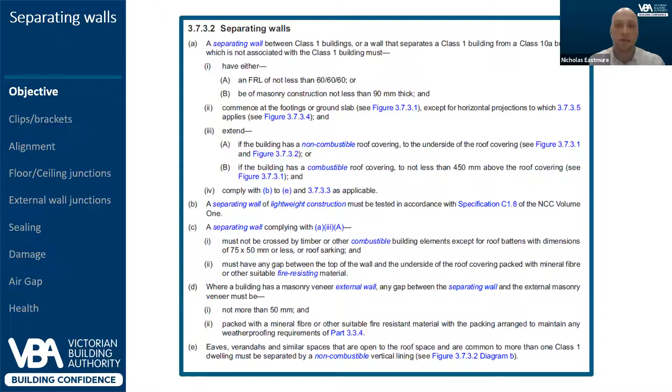This is where we turn to part 3.7.3.2 of the NCC for the requirements of separating walls. We know that most separating walls on site are lightweight construction, so let's remove the permit related items so we can keep this down to, again, its most basic principle for on-site construction. This is that our separating wall must obtain an FRL of not less than 60/60/60. I will make a big point here in that this test requires the wall to meet the required FRL on both sides of the wall. This is unlike a typical external wall of a single dwelling in that it would only require the FRL on one side, being the external face.

There are other elements within this clause that relate to a lightweight separating wall that we will touch on, but let's leave the requirements for the relevant building surveyor assessing the permit documentation. The FRL of a building element is broken down into 3 components and is always expressed in the same order: structural adequacy, integrity, and insulation. Now that we know what the NCC requires, let's start looking at some of the walls used to meet these requirements.

Regardless of the separating wall being installed, we must remember that it is a tested system. System is the one word that I'm trying to emphasize here by showing the different manufacturers' details when it comes to providing the required fire rating. If we can start to understand how these systems work overall, it will give us a better understanding of each component and its role within the system. Now, let's have a look and see what a separating wall does to achieve our requirement and prevent the spread of fire.

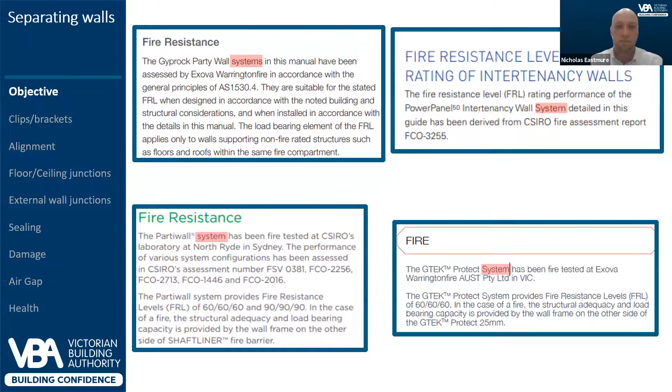How these systems work in the event of a fire is perfectly illustrated in the diagram located within the GTEK installation guide. As I previously mentioned, this system must obtain the required FRL on both sides, as we cannot assume where the fire will start. If a fire were to occur, then we need to make sure that the separating wall will remain functioning and not be compromised. If it was compromised, then we will no longer meet the performance requirement.

These systems are designed so that in the event of a fire, the connections between the wall and the frame melt. This detaches the separating wall from the frame exposed to fire so that if the structure collapses, the separating wall will remain in place to protect our remaining Class 1 from the spread of fire. Please note that it is for this reason the substitution away from the aluminium clips will compromise the entire system from the get-go. Now that we know how these separating walls work if a fire occurred, we can start to appreciate that the clips are a crucial aspect of the wall system. Let's look at what we observe on site.

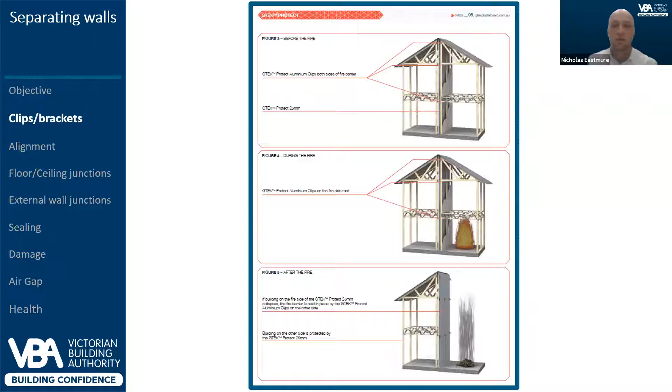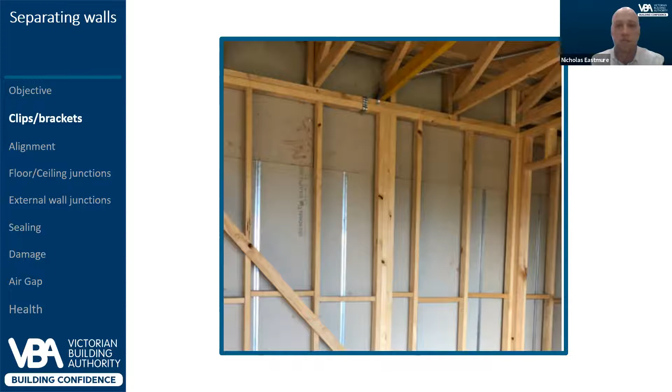You can see now where the clips are required to be installed on both sides of the wall. They were clearly missing from the photo, and it is a very common non-compliance that we come across. On this system, the clips need to be installed to the underside of the top plate and fixed into the metal H-stud of the shaft liner wall. The required spacing is at 600mm centers, and amazingly enough, these panels are 600mm wide. Therefore, every stud should have a clip, which shouldn't be too hard to remember when we go back out on site.

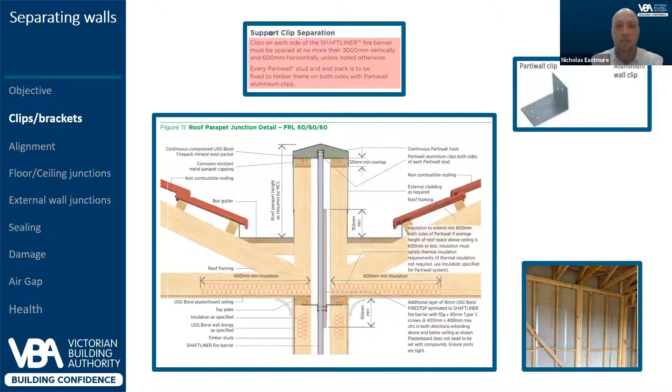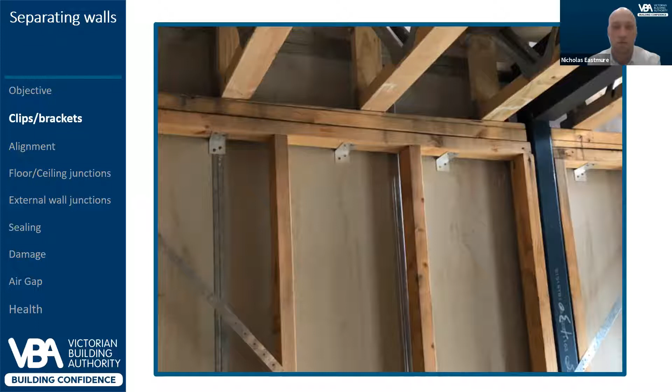Following on with our shaft liner system, this one is manufactured by Gyprock. We are looking at the junction between the ground and first floor areas of the adjacent Class 1s. You can see here that the additional layer of protection has not been installed, but let's keep our focus on the clips for the moment. You can see that they have been installed, however, they are penetrating the shaft liner rather than the party wall stud. This example clearly shows that even with inconsistent fixings, eventually we can get one right. Let's see what the system requires.

Here you can see that the Gyprock separating wall system not only requires the additional layer of fire stopping, but again reinforces that these clips must be installed into every H-stud on both sides of the wall. When we have penetrations into the shaft liner, we are compromising the fire rating of the system, and we can no longer assume we comply to prevent the spread of fire.

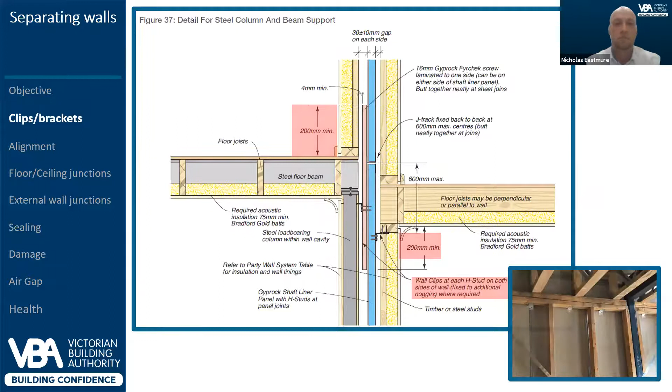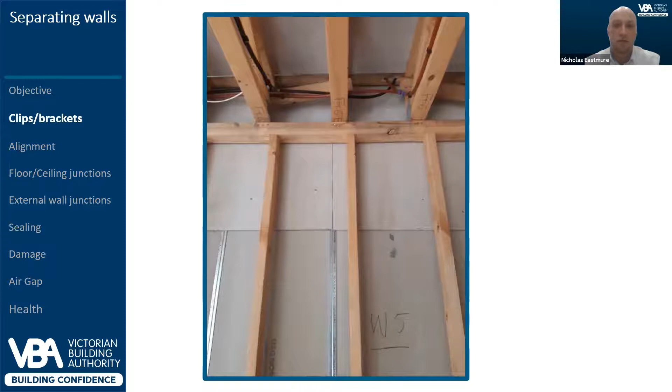Same thing as last slide, but a different site and back to the Boral system. This area is showing the floor junction between the ground and first floor of adjacent Class 1s. Unlike the previous slide, we can see here that the additional layer of fire stopping has been installed, but again, no clips have been provided to this side of the wall. Let's then compare back to the installation guide and see if this is as per our tested system. This detail is quite clear in what is to be constructed. The clips must be installed on both sides of the wall and fixed through the additional layer of fire stopping and into the H-stud.

It is important that we follow the installation procedure when installing these systems. The manufacturers have designed a product to facilitate a smooth construction process when on site. If we deviate from it, we create our own risks. Looking at the installation procedure in this case, the clips are to be installed progressively during construction and fixed into the party wall stud.

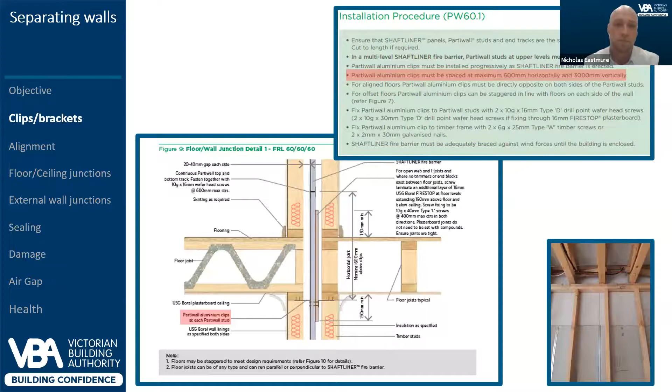Each manufacturer has their own installation details, but remember, to ensure we can prevent the spread of fire, we need to install the separating wall as per its test to confirm the FRL of 60-60-60.

If we have a look at this GTEK separating wall system, you can see that in the photo, the clips on this wall have been installed directly into the shaft liner and connect to the stud rather than the underside of the top plate. During this inspection, clips had been installed on both sides in a similar fashion. So is this what our system is meant to look like? Let's compare.

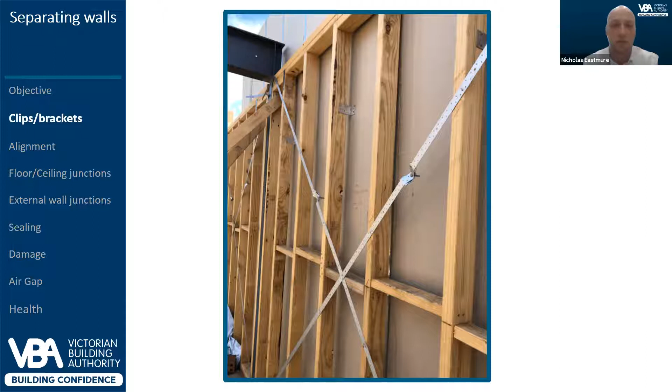We can see here that the manufacturer clearly states that there should be no penetrations into the GTEK Protect board. When we install clips like this, we are clearly compromising the fire rating and it should not be occurring. It will also raise other issues regarding the transmission of noise, but we will touch on that later.

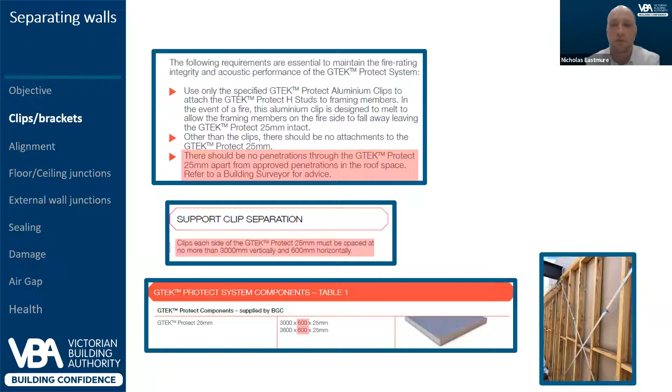Again, this product nominates that the clips are to be installed 600 mm horizontally, and yet again, our sheets are 600 mm wide. So again, on this system, every stud should have a clip appropriately installed. The clip installation is not just limited to the junctions of floors, but also applies to the fire separation within the roof area of the adjoining Class 1 dwellings.

Continuing with the GTEK system, but on a different site, we are now looking at a separating wall that is including a pitched roof. You can see here that the dividing wall has the additional layer of fire protection. It has the clips installed at the underside of the top plate and they're fixed into the separating wall studs. It's ticking all the right boxes so far.

However, there are no clips installed to the underside of the truss top chord. These are required to adequately support the wall and facilitate the required fire separation between the roof areas. So now let's have a look at how this system is required to be installed to ensure we can prevent the spread of fire.

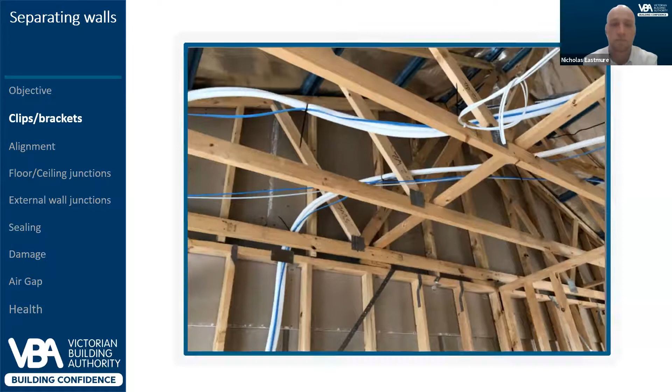We can see here that the manufacturer requires us to install clips on both sides of the wall. These are attached to the underside of the top chord and fixed directly into the H-stud of the separating wall. In this diagram, we again confirm that the clips to the underside of the top plate are correct, and at this site we had clips on both sides of the wall. So close, but yet so far from being installed correctly.

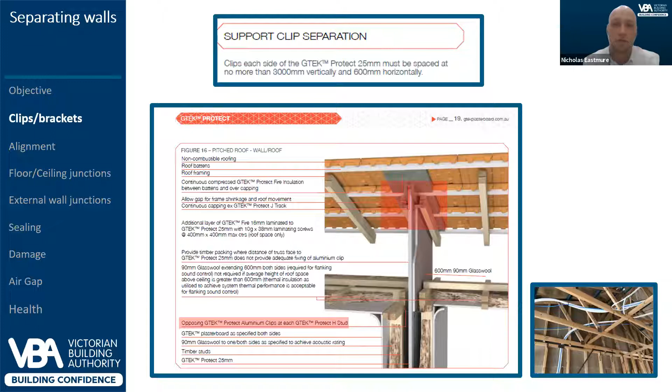This is not just limited to shaft liner systems either. Here we have a Hebel PowerPanel forming our separation wall. The area we are looking at is a junction between the ground and first floor areas of adjacent Class 1s. In this photo, again, we are not seeing the installation of brackets to this side of the wall. So let's again compare to see what we can see when compared to the manufacturer requirements.

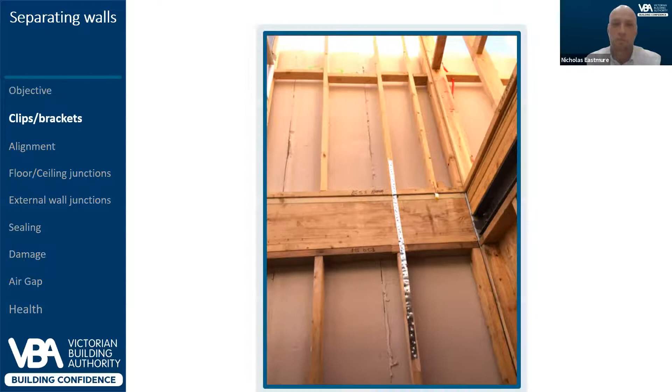We can see here that the system requires the panels to be fixed on both sides. The base panel is to be connected to the underside of the top plate, and the top panel is to be connected to the bottom plate of the upper story in this section. We must also ensure that these brackets are within 600 mm of the connection in the PowerPanel. Again, on this site, we observe the brackets were only installed to one side of the wall.

Given the importance of these clips to maintain a functioning wall in the event of a fire, we all need to make sure that we are attaching them correctly. The examples just provided would not be able to function and provide the required objective, which is to prevent the spread of fire. Now that we have a clearer understanding of the importance of clips, we can move on to the alignment of panels.

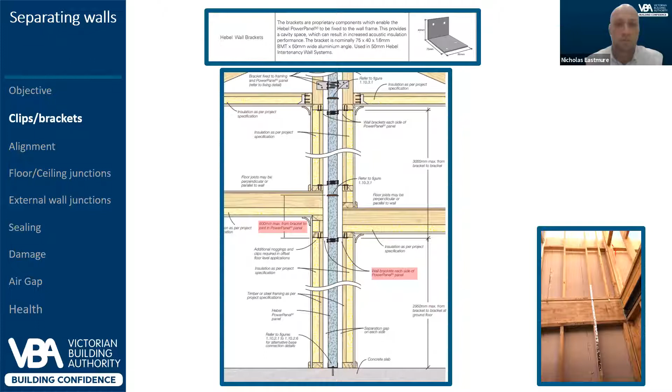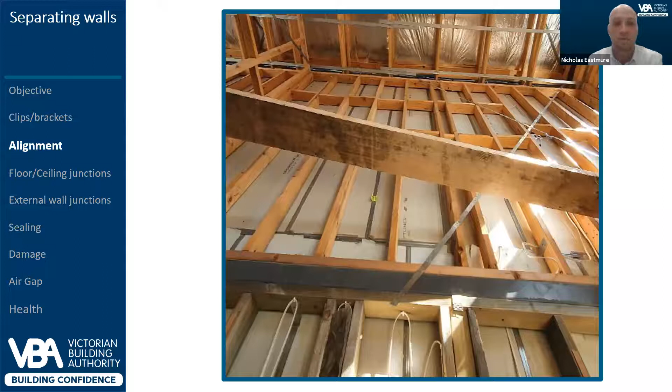Let's have a look. We can see here that the Boral shaft liner system requires the studs of the upper level to align with the studs below. These studs need to align vertically so they can transfer their own loads appropriately down into the footing. Where these panels are offset, we are deviating from the tested system and can no longer ensure that the required fire separation is being maintained. We must always seek advice from the manufacturer to confirm compliance when this kind of construction occurs. Let's have a look at other areas where this is seen, but on a Gyprock system.

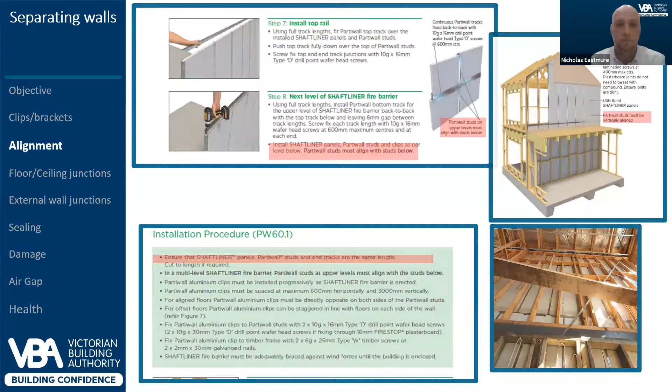Here we can see the installation of a Gyprock separating system, and it has the H-studs offset. We can see here a clip has been installed into the H-stud, but has not been secured to the underside of the top plate. It's not much use if there was a fire in the adjoining dwelling. There is no additional layer of fire stopping installed either, but this gives us another good look at the alignment of how these panels are connecting.

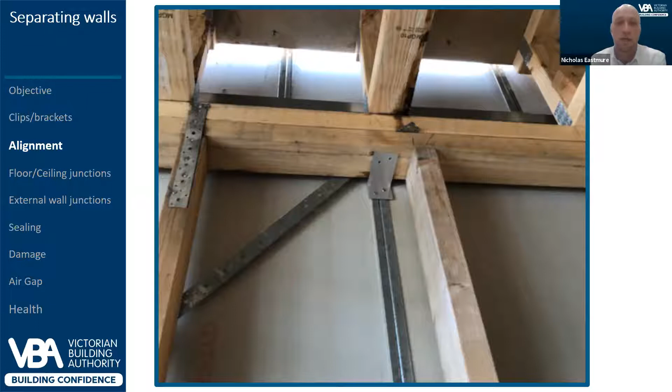We can see that this area is at the junction between the ground and first floor areas of adjacent class 1s. So let's compare this to what the manufacturer requires. We can see here that within the checklist provided by the manufacturer, the second item is to ensure the walls, all H-studs, align at each storey except in the roof space. The detail shown tells us that once we get to the roof space, we can have an offset of a maximum 300 mm in the stud alignment. This cannot be allowed anywhere else in the wall, and this will not comply with the tested system.

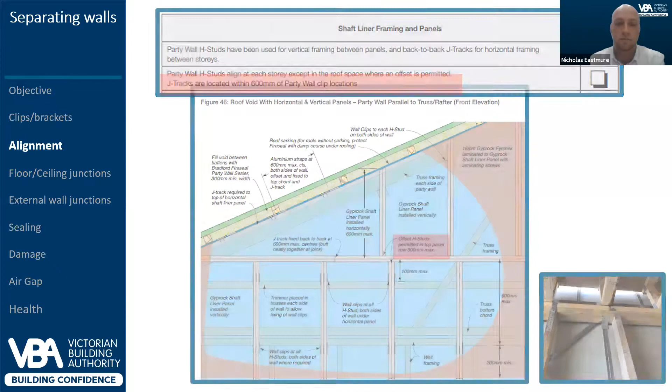Whilst we are on the alignment of panels, it is important that we then look to ensure the correct H-studs and tracks are installed. You can see in this photo that a Boral shaft liner system has been installed. Let's highlight quickly that the additional layer of fire stopping does not extend the full length, but we will also cover that later on. If we focus on the junction where the 4 panels are meeting, we can see that there is a clear gap in the connection due to the track being substituted by a H-stud. Let's see what the manufacturer requires us to install on site and see if we can be sure that this will provide our required fire rating.

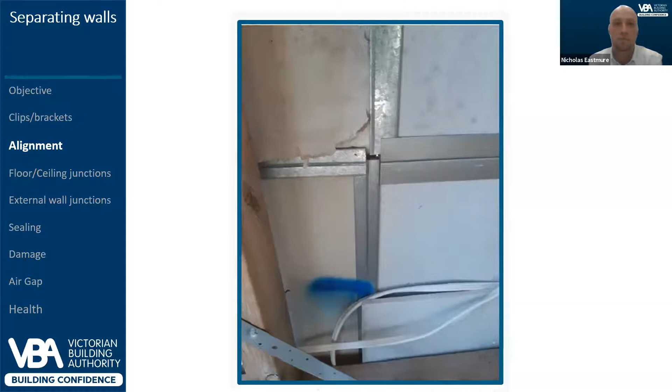Now we can see what the cross section should look like. It is clear that on this site, we have substituted the H-stud for the Partiwall track. We have not provided a continuous steel track running the length of the wall, and the studs are not terminating correctly. If this had remained as is, in the event of a fire, this would have failed due to this area. Alignment of panels is very obvious when you're on site. Please do not overlook this area. So now we can move on to the floor junctions, which we have touched on a few times now.

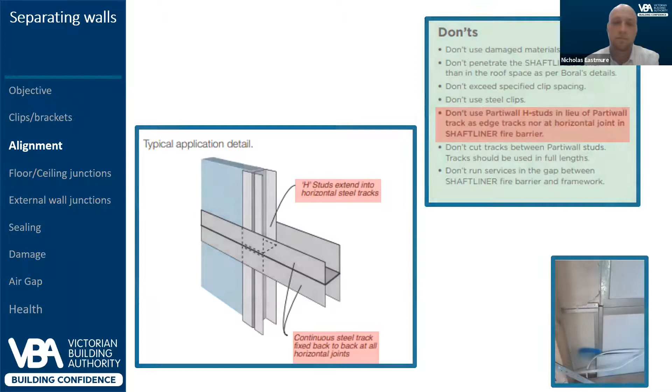You will notice that most shaft liner systems will require an additional layer of fire stopping when it comes to not only floor, but ceiling junctions. This is due to the increased fuel load seen in these areas caused by the intersecting timber members. Again, this wall must maintain its FRL for 60 minutes, and this is where a lot of the hard work will occur. It is critical that we get this additional layer installed correctly, and it is again another common item we observe as non-compliant. In this photo, we can see that a Gyprock system is being installed. We are looking at the first floor junction of adjacent class 1s and can see that the additional layer is only extending below the junction and has a lot of fixings along the base. So let's have a look and see how this compares against what needs to be installed.

We can see here what the Gyprock system requires from us. The additional fire stopping must extend a minimum of 200 mm past the floor and ceiling junction and be fixed to the shaft liner with laminating screws at 400 by 400 spacings. On this site, we were not getting the required coverage above the floor joists, and our very enthusiastic person laminating the additional fire stop has decided to increase the fixings due to not being able to install the additional rows of screws. This compromises the system. It's good to see the panels are aligning though, and the clips have been installed. Let's have a look at the same thing, but on a GTEK system.

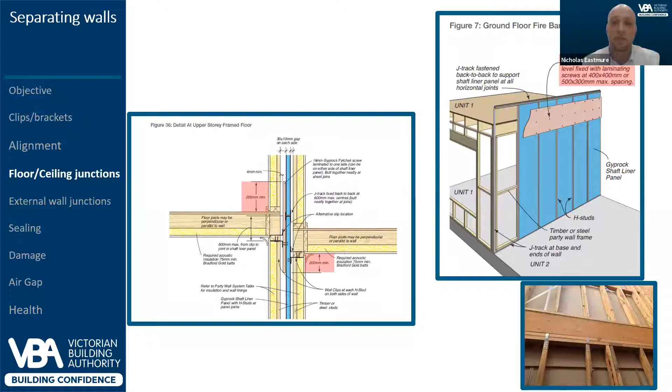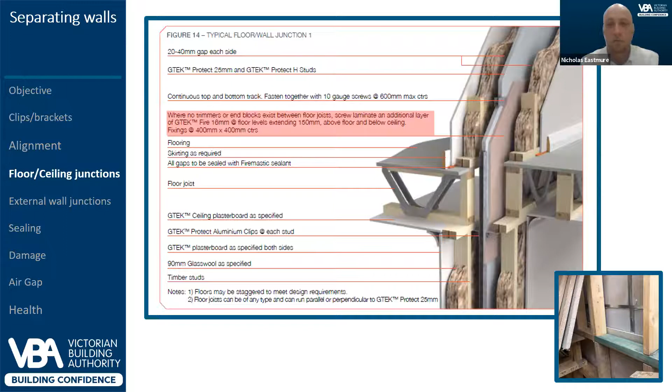Again, we are looking at the junction of floor joists to the separating wall between adjacent class 1s. You can see in this photo that we have the additional layer installed and our panels are aligning, which is a good start. But again, we bring it back to the tested system and the required installation guide. So let's compare. We can see here that our additional layer of GTEK Fire is required to extend a minimum 150 mm above and below the floor or ceiling. We were not achieving this on site. And again, thinking about the additional fuel load sitting in this area, we can no longer be assured that we will maintain the FRL of 60/60/60. So let's now look at a Boral system for the same thing, and I'm sure you are getting used to the idea of what is required.

So again, we have our Boral shaft liner at the junction of the floor joists. These panels are not aligning and our coverage for the additional layer is minimal. Let's look at what we need to install to again ensure we prevent the spread of fire.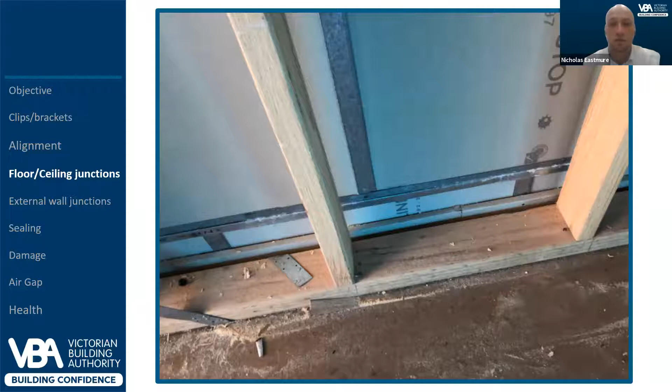The additional layer for the Boral wall is also required to extend a minimum 150 mil past the floor joist as shown within the detail. This is clearly not being achieved on this site and will only limit the separating wall's ability to prevent the spread of fire.

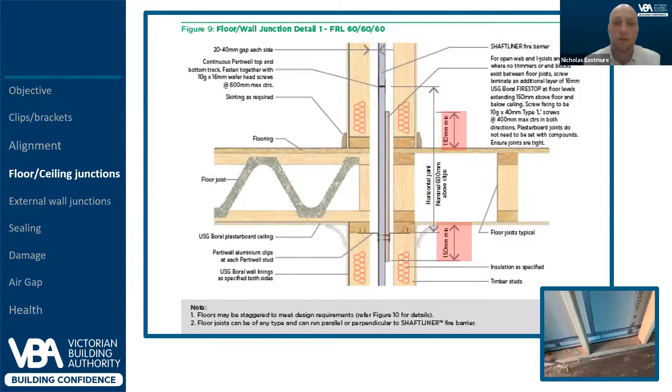We have to make sure that these additional layers run the full length of the wall. As you can see here, and as touched on previously, the additional layer of fire stopping terminates well short and leaves the remainder of the dwelling exposed at this junction. This is not in accordance with the tested system and leaves the occupants at risk in the event of a fire.

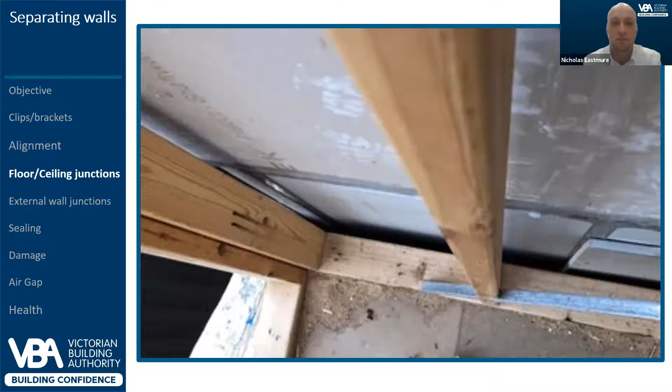So let's move on to the ceiling junctions. It is the same setup in that there is an increased fuel load in this area and requires particular attention. Here we can see a Boral system being installed. We are looking at the parapet junction between adjacent Class 1 dwellings. We can see that no additional layer of fire stopping has been installed and neither of the clips.

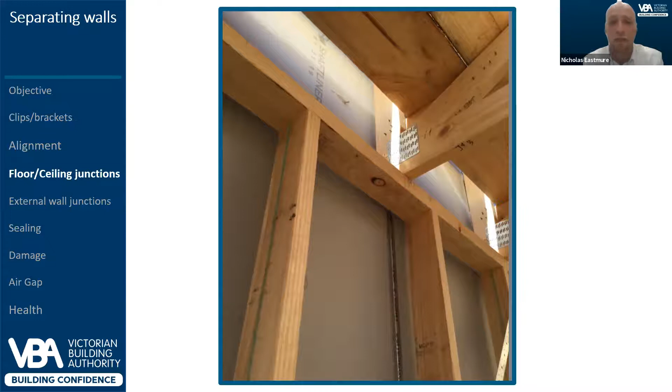Not installing the clips works out well in this scenario, given they need to go through the additional layer of fire stopping and into the H-stud. So let's look and compare this to what our manufacturer installation requirements are.

We can see here again that the additional fire stopping is required. It is required to extend 150 mil past both sides of the gutter and ceiling and clip to the frame appropriately. If left like this and a fire occurred in the adjacent unit, the roof area will be left unprotected and fire will be able to spread.

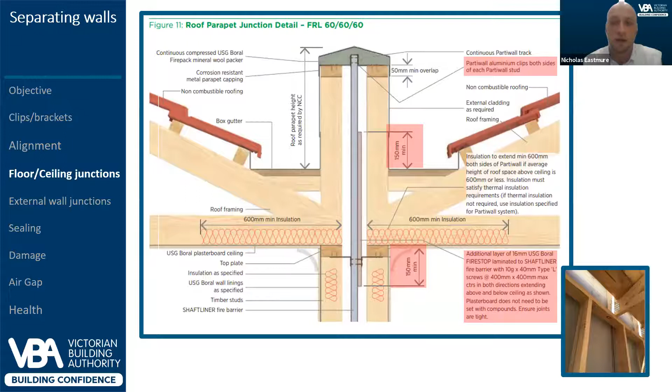Let's now have a look at the requirements for a Gyprock separating wall. As you can see from this photo, we already have some concerns with the clip installation as they are not installed into the H-stud. And we also do not have any additional layer of fire stopping. This is where it is imperative that we always refer back to the manufacturer's guidelines to ensure we are installing it correctly. So let's look at what is required.

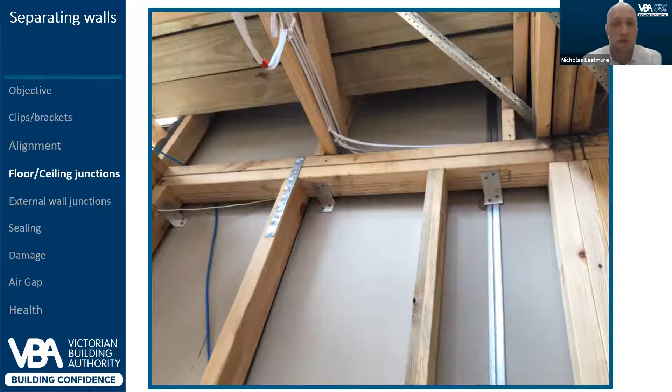In a Gyprock system, the additional layer of fire stopping is to be installed to the top of the shaft liner and must extend a minimum 200 mil below the ceiling. As you can see here and hopefully start to appreciate, there are different spans required for different systems. Do not fall into the habit of assuming all systems are the same.

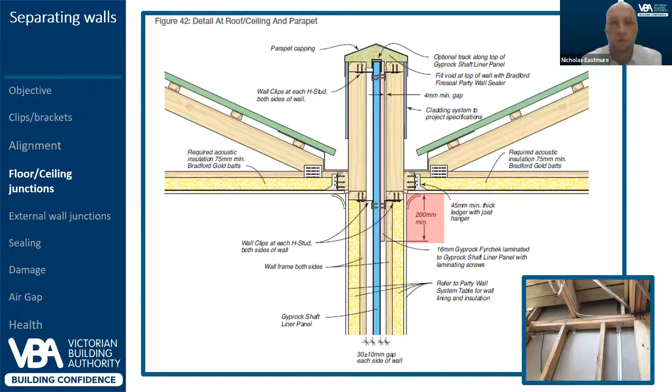When it comes to laminating the additional layer to the shaft liner, we need to again make sure we are doing it correctly. As you can see in the photo here, the laminating method chosen for the Boral shaft liner was to use nails with a very inconsistent spacing. As always, let's turn back to the required installation.

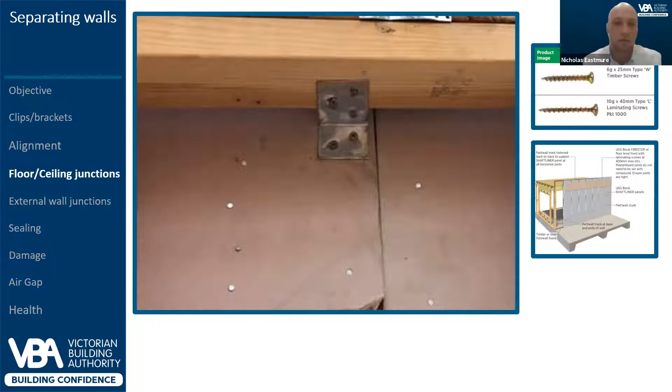We can see here that the tested system requires us to utilize laminating screws at 400 mil max centers. This is a substantial deviation from the tested system. With incorrect fixings and spacings, we are no longer ensuring that we can prevent the spread of fire.

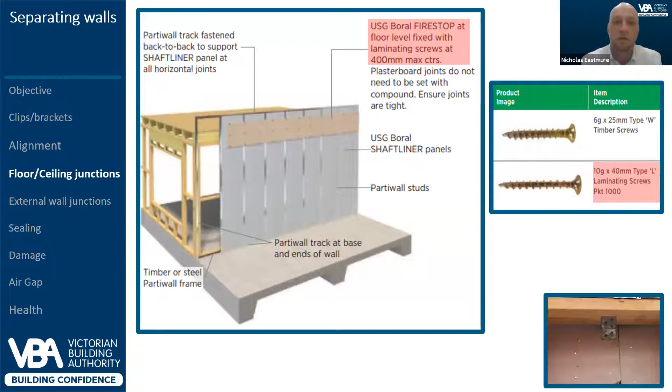You can see here we are looking at the top of the separating wall, which again is a Boral shaft liner. The very obvious concern we can see is that the separating wall does not go to the full height of the dwellings and will only facilitate the spread of fire. We can see the additional layer has been provided, which is a great start, but again, nowhere near its required location.

Despite me saying not to make assumptions, it is safe to say that regardless of the system, we must make sure that it extends the full height of the Class 1 dwellings. So again, let's revert back to what the manufacturer requires when terminating at a parapet.

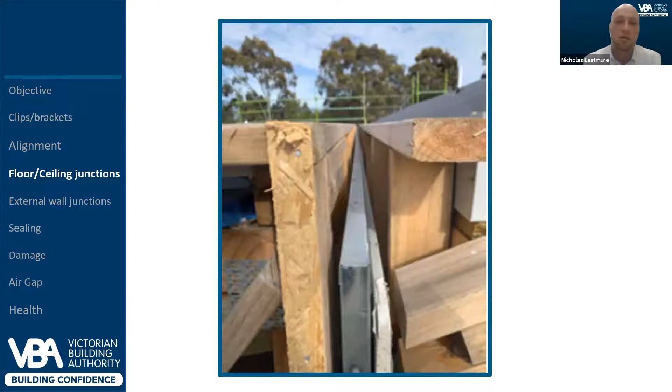We can see clearly that the shaft liner is to extend beyond the timber frame and then be packed with a suitable mineral wool packer to then seal the top gap. The additional layer is also again required to extend 150 mil past the gutter and ceiling. This has not been installed correctly, and we cannot demonstrate that this construction will prevent the spread of fire.

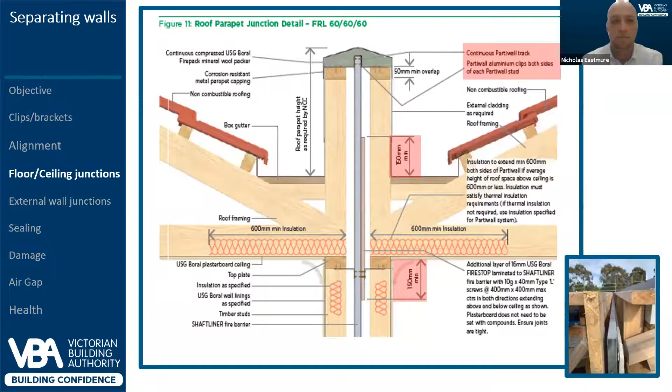So let's again look at the roof junction. On this site, we have a Hebel wall that was utilized. It is important to also keep in mind that these systems will throw back to the NCC for the allowance of members to cross a separating wall.

Similar to the shaft liner systems, we have to ensure that all gaps are appropriately sealed. As you can see in this photo, the combustible roof battens are crossing the separating wall, and there are gaps between the Hebel and the roof lining. So let's have a look at what is required by both the manufacturer and the NCC.

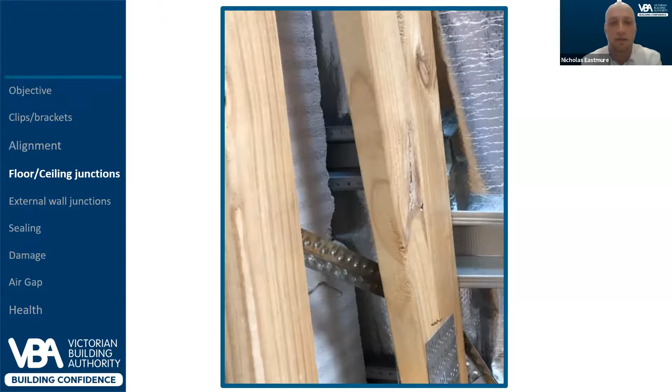As we can see here, the Hebel installation guide requires us to fully seal the gaps with the required Bradford Fireseal party wall sealer with 10% compression. This is not the case for what we saw on site, and left open, the wall will not prevent the spread of fire.

You will notice that the detail also nominates the NCC clause 3.7.1.8 subclause D. This clause is referencing the 2016 version of the NCC, but the relevant provision for the NCC 2019 is 3.7.3.2 with subclause C, which has been shown.

This clause is important as it details the only members that are to cross a separating wall. In this instance, we have combustible roof battens, which is allowed providing we terminate the wall appropriately. The infilling of these gaps is shown within II of this clause. But again, the wall system is tested to ensure this aspect of the NCC is covered, and the note is closing the loop between these two documents.

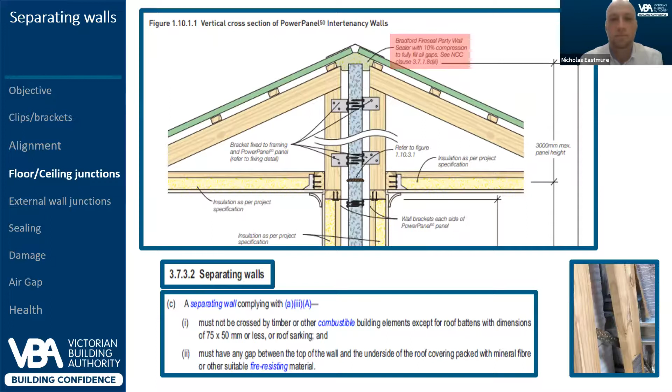So now we can look at how we are terminating the separating wall at an external wall. In this instance, we have a Boral shaft liner system being installed and is viewed from above. We will touch on the external track required at the end of the panel shortly. However, let's get into the hot topic right now, which is when we utilize EPS as an external wall. This is a big concern when the EPS forms a continuous horizontal link across the shaft liner system, which is being shown here. Let's look closer at the external wall junction and what is required.

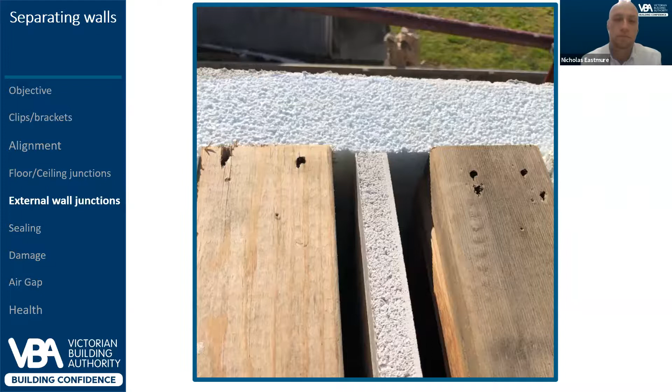So as you can see here, the Boral shaft liner system has a detail on how to terminate appropriately with a lightweight external cladding. This detail is important to understand. It allows us to terminate at the external cladding, but as we are all well aware, EPS is combustible. In the current example, our shaft liner has an FRL proven on both sides and takes into account how it interacts with the external wall.

Where we have EPS as our external wall, once it is exposed to fire, it will not be able to maintain the FRL required of 60/60/60, and it will spread to the adjacent dwelling. We then no longer comply with the performance requirement, which was to protect the Class 1s from the spread of fire. In this situation, the EPS was later replaced with Hebel to achieve compliance with both the manufacturer's installation guide and the NCC. Please keep an eye out for this occurring and speak to your relevant building surveyor for further advice.

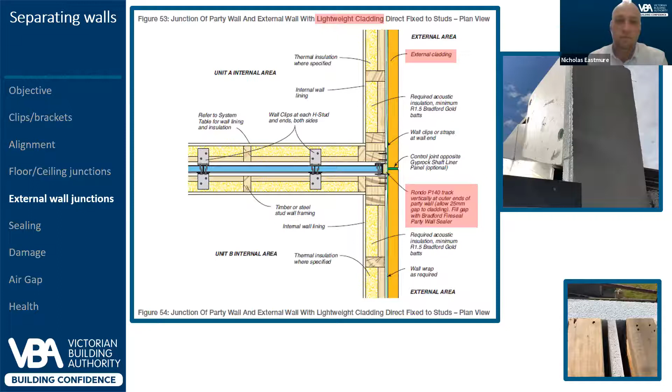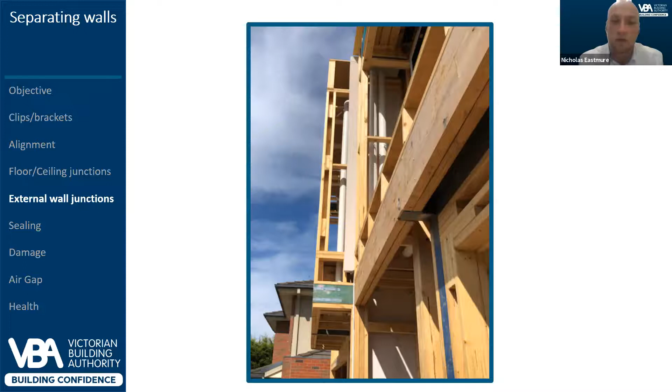Continuing with the termination at external walls, let's have a look at this Hebel installation. As you can see in the photo, the separating wall stops well short of our external wall. If you can put your arm from one Class 1 to the other, then we will not comply. So let's have a look at what this should look like on site. As we can see here, the Hebel product allows for overhanging walls. It is important that the PowerPanel is installed so that it can terminate appropriately with its external wall. If this cannot be achieved, then once again, we won't prevent the spread of fire.

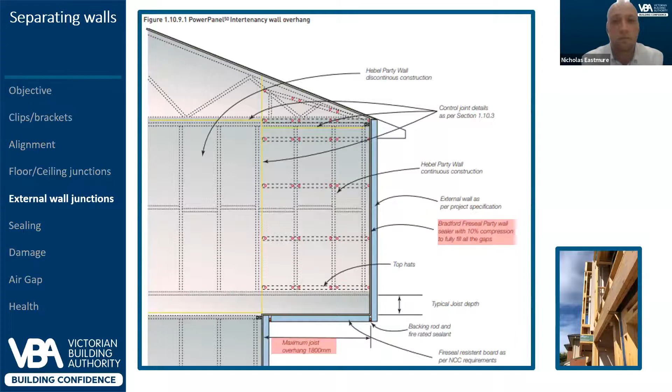This is not limited to one system either. We can see here that our Boral shaft liner is not extending the full length of the dwelling, and the base track was terminating in line with the end of this panel. These areas cannot be overlooked, and the entire length of the Class 1 must be protected. Within this detail, you can see that a continuous party wall track is required to be installed to the end of the wall panels. Within the installation guide, the system allows us to cut the last panel to size. We should not leave areas like this open to facilitate the spread of fire.

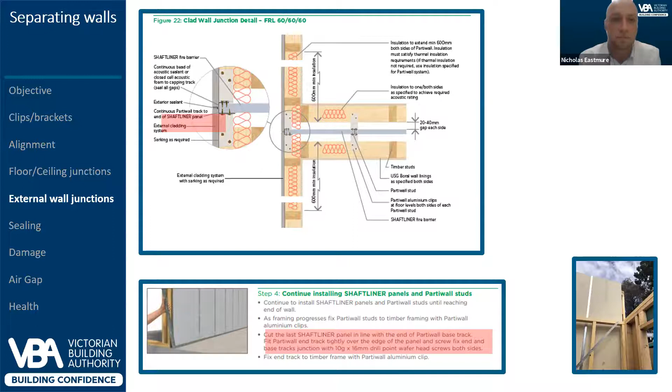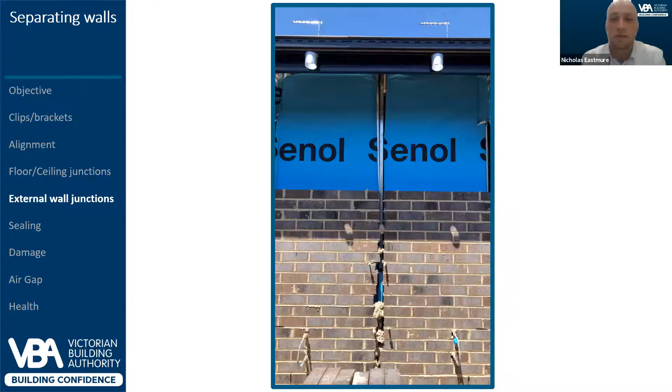In this situation, we were looking at a Boral shaft liner where it is intersecting an external masonry wall. We can see that the separating wall is spanning the whole length and the additional layer of fire protection installed at the roof area. It is important to get these areas correct, as any gap, which includes the rebate, will not prevent the spread of fire. So let's look at what is required on this system, as this is another very common non-compliance that we observe.

You can see here that for the shaft liner, the shaft liner is to be covered by a continuous compressed mineral wool packer, and the insulation is to extend over this to ensure it is not exposed to weather. This detail also shows that a control joint is required opposite the shaft liner. This is handy when it comes to doing inspections.

If you are doing a final and the control joints have not yet been weather sealed, have a look through and see what is visible. If you can see a shaft liner track, well then you know there is nothing infilling the rebate. So hopefully now we have a better understanding of external wall junctions. We'll now jump into the sealing of separating walls.

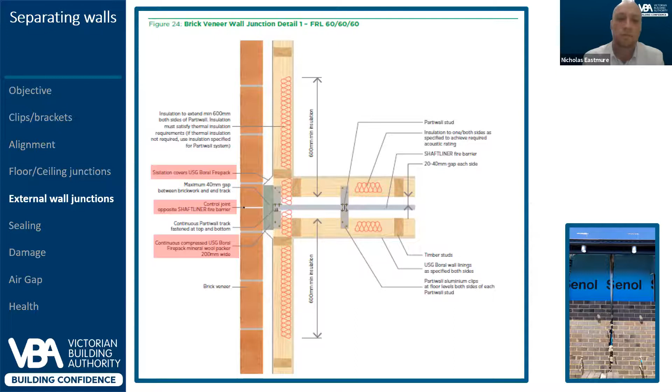This item is very commonly overlooked, as most of our attention turns to looking at everything above the base of the wall, but it is critical that we seal the base. This photo is showing a Boral shaft liner system from above. Its base track has been secured to the slab, but there is no evidence that it is being sealed on either side of the wall. So again, let's have a look at what the manufacturer requires.

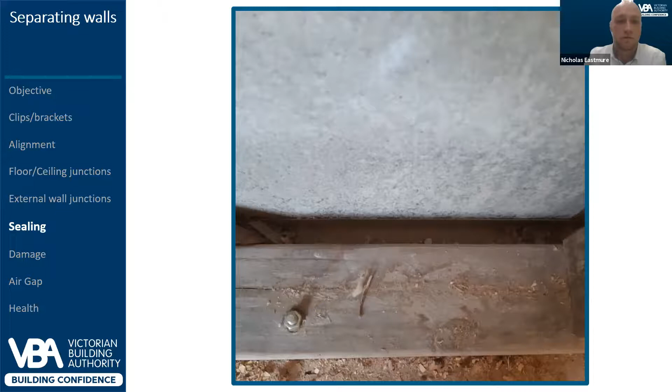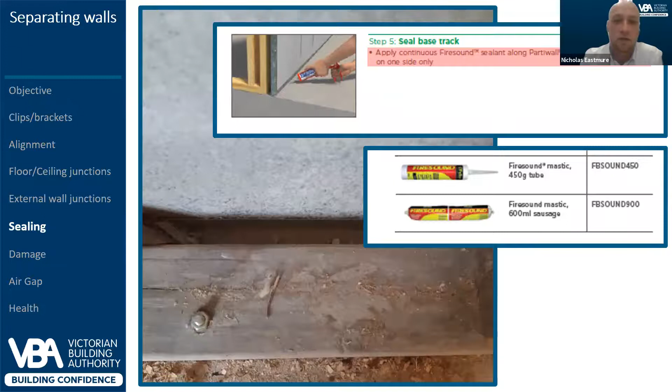As you can see within the manufacturer's installation guide, step 5 requires us to apply a continuous seal along the base track on one side. They have also nominated suitable products to be utilized as part of this system. If we do not seal the base track, we cannot be certain that we are preventing the spread of fire.

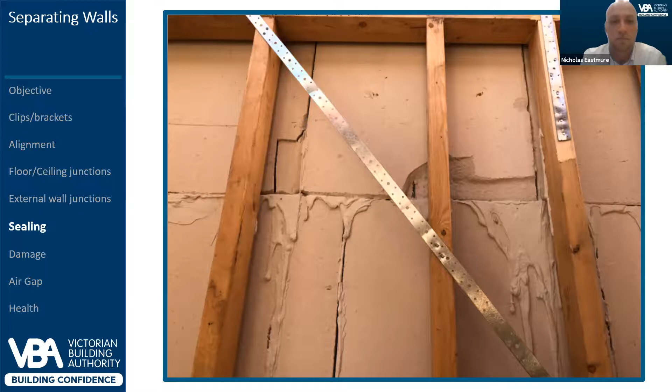So now we can see the before and after image of the same wall. Bringing this back to its installation requirements, we first need to make sure that we are installing these panels correctly. To do this, we must follow the adhesive requirements. It asks that we must have a joint that is at least 2 to 3 mil thick after suitable pressure has been applied to the panels to ensure an appropriate attachment.

The force applied should make the excess adhesive protrude, which then gets scraped off, ensuring a tight seal across the panel. To then seal the wall, any other remaining gaps or movement joints must then be sealed so that both the fire and sound ratings can be achieved. So now let's move on to damaged panels within our separating wall.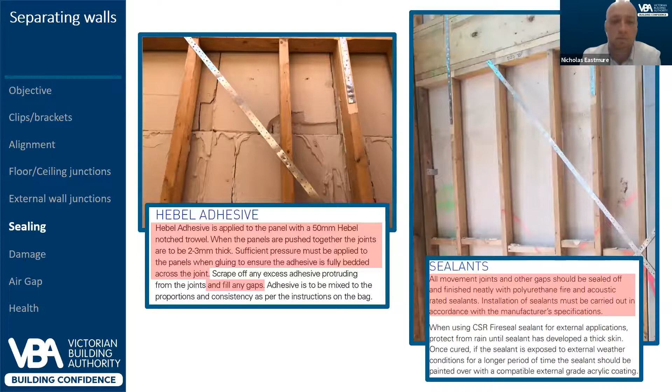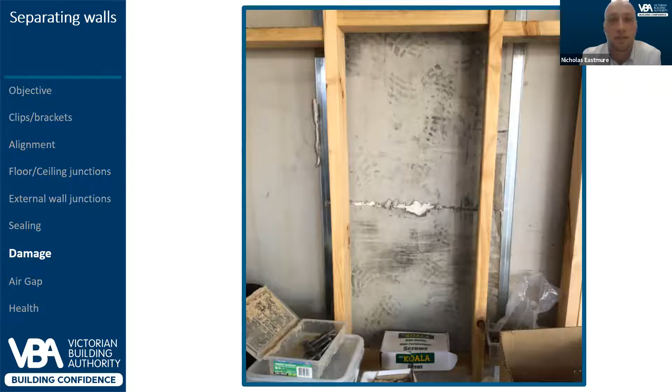Here we can see that on-site storage plays a big part in keeping these materials fit for purpose. If they are laid around in high traffic areas, trades will walk on them. So again, let's go back to the manufacturer's installation guide, which in this instance is Boral. Here we can see that the first item under the don't section is not to use damaged materials. In this instance, the rectification works were sought from the manufacturer and subsequently installed.

You can see that the repair work extends well beyond the area of the damage. This is not only due to the reduced effectiveness in the case of a fire, but also because the wall systems have other tests required to confirm things such as its resistance to damage, deflection, and surface indentation. For those interested, these tests are outlined within the NCC 2019 Volume 1 Specification C1.8.

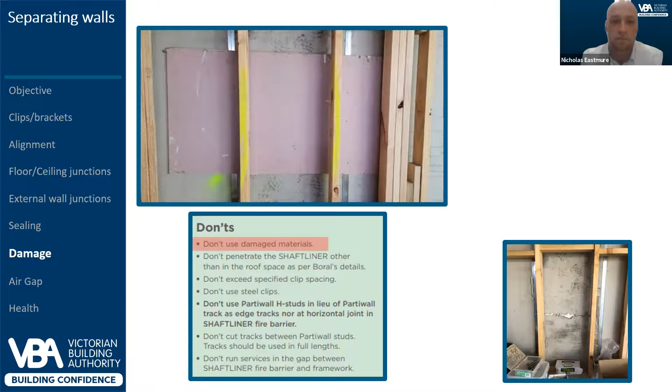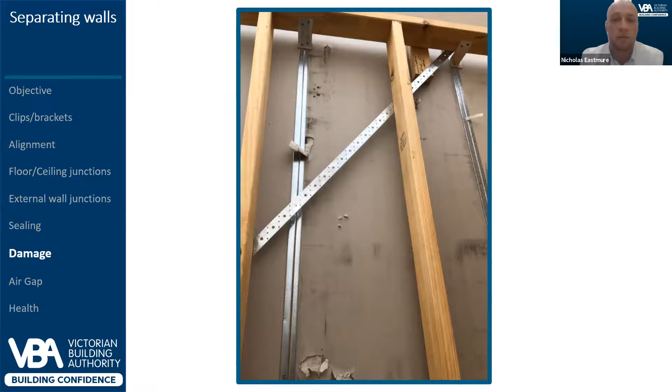Again, illustrating the point for the damage. In this photo, we can see that the Gyprock panel has been damaged and has seen better days. Different manufacturer, so again, let's have a look and see what they say in regards to damage. We can see here that when it comes to the Gyprock system, any physical damage to either the core or paper face must be replaced. And on this site, that is exactly what they did.

Not all systems have the associated testing to confirm the repair works can maintain the wall system. It is for that reason we always go back to the manufacturer to determine the appropriate remedy. We have just covered a lot of the concerns that proactive inspections have found for aspects relating to the fire separation. But as we now hopefully understand, this is a system that we are installing.

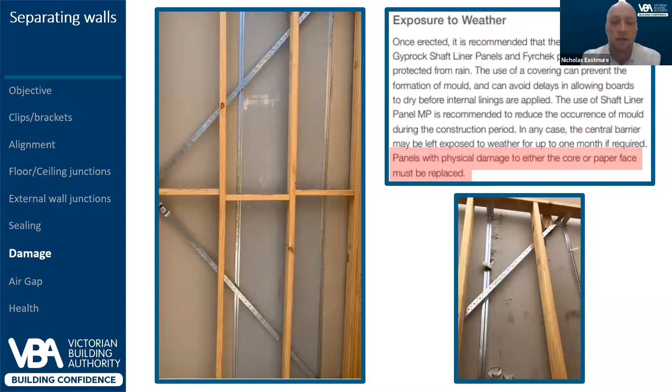The wall itself has to do a lot more than just provide fire separation. It must also provide the required insulation against sound transmission. It is important to understand the dual purpose of these walls when it comes to the details within the installation guide. So we will now look at the air gap.

As you can see here, we have a Gyprock fire separating wall system. It is not providing the required gap between the shaft liner and the timber frame, and on some sites we see the shaft liner in direct contact for the full length. So let's have a look back at the required installation detail.

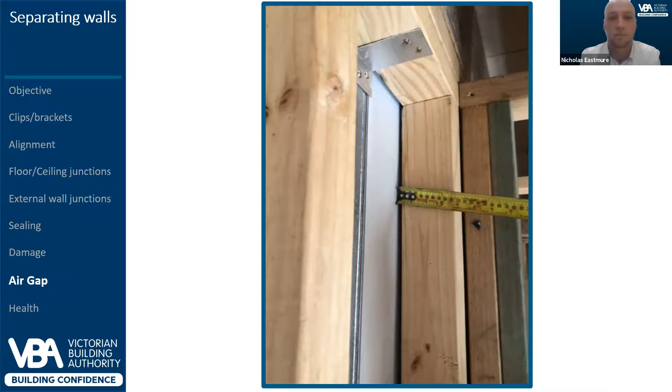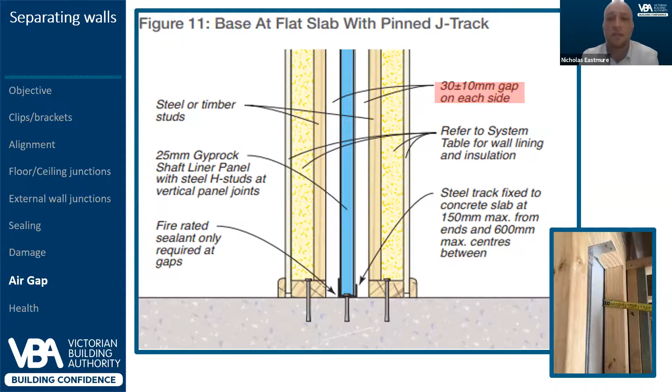As you can see here, and like shown on previous slides, we have to provide a 30 mm gap to each side with an allowed 10 mm variance. Again, this is to ensure our class 1s are insulated against the transmission of airborne and impact generated sounds. When we get this gap down to near 0 mm, it is going to significantly impact the ability for the wall to comply with the sound transmission requirements. These requirements around sound insulation are also not just limited to the air gap. So let's have a look at our next slide.

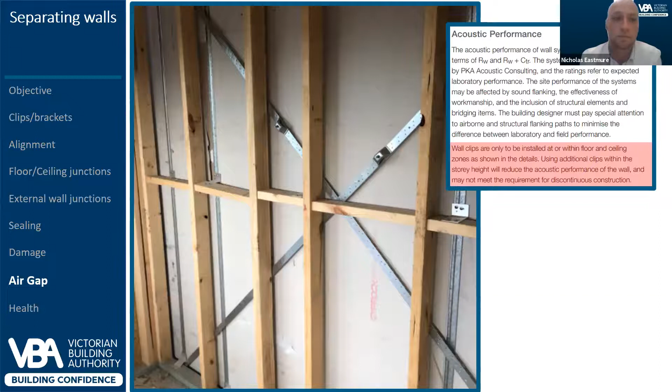Continuing on with our air gap, we commonly see this space filled with services. As you can see in the photo here, we have services directly fixed to the GTEC separating wall system and running within the air gap. Based on the requirements of this wall, the manufacturer states that all services should be run through the framing and that to maintain acoustic performance, the service pipes must not be in contact with the GTEC system, which has not been achieved in this scenario.

This is not limited to just the GTEC system either. You can see here we have our Boral shaft liner providing our separating wall. And again, we can see our services directly fixed to the wall, which will make us again have to consider the transmission of noise. It's pretty clear that the manufacturer states to maintain acoustic performance, service pipes must not be in contact with the shaft liner, and that all services should run through the timber frame. This is again evidently not what we are seeing at this site. So again, let's have a look at a Gyprock system with the same issue.

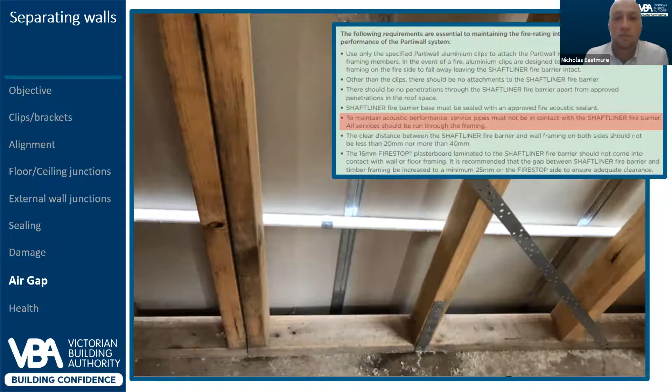Here we can see our Gyprock separating wall. You can see that the electrician has enjoyed his day running the cables within the air gap in lieu of through the timber frame. We can see here that the required installation for services is ideally through the timber frame, or if provided in the gap, we must maintain a minimum of 10 mm clearance to the shaft liner. In this instance, we would need to see that all cables were fixed back to the stud to ensure this could be achieved. Maybe not the most time-effective strategy overall.

As you can see in this photo, we have a Gyprock wall system that has been exposed to weather for too long and is now experiencing a large amount of mold growth. If this is covered, it will only spread and then pose a serious threat to the health and amenity of the occupants. It is recommended that the shaft liner system should be protected from rain and not left exposed for any longer than 1 month, which obviously was not the case here. So let's see this in another system.

Here we can see our Boral separating wall is experiencing a large amount of mold also. When it comes to the Boral shaft liner system, exposure of components to the weather elements should be avoided. And if it's going to be exposed for a month or more, then it should be appropriately protected. If you see this on site, please do not cover the wall. The rectification costs will be a lot more later on, not to mention the risk to the occupants exposed while living at the dwelling.

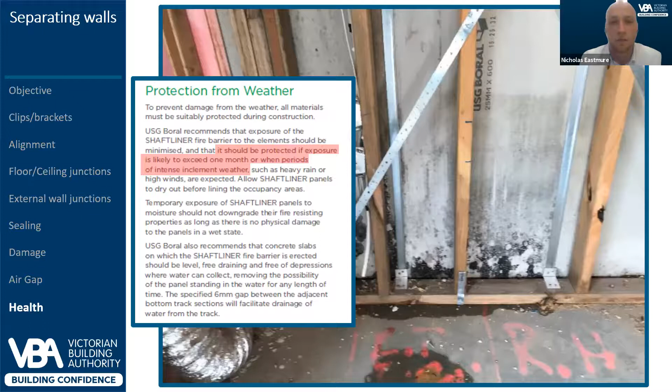We hope that this raises the awareness of the issues we are experiencing on site. By no means is this an overall checklist for the installation of these systems. Always refer back to the manufacturer's guidelines for the correct installation of the product nominated within the building permit documents. The more eyes we have looking at these walls to ensure they comply, the quicker we can provide a safer built environment for the public.

Thank you for your time, and I will now pass over to my colleague Alex to briefly discuss a few fire safety performance issues relating to non-compliant separating walls.

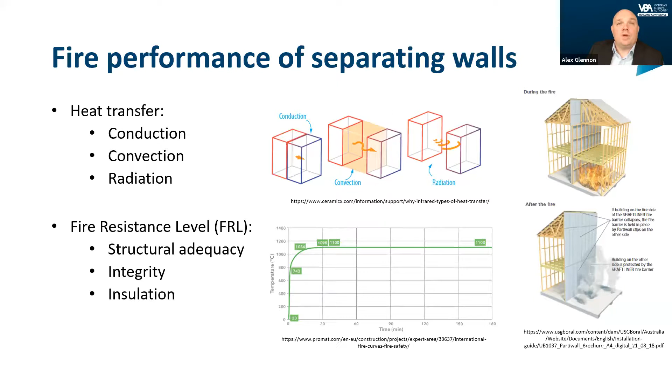The wall systems, as correctly installed, have been tested to verify their performance in fire, and one or a combination of these small defects could compromise that performance, and therefore compromise safety in the neighboring building. Shaft liner systems are very good, but their performance is only as good as their installation. And without careful construction monitoring, once sealed, errors might only be discovered when the walls are needed the most. This is obviously true for all passive protection systems.

The second thing I'd like to talk about is what options are available for addressing construction defects for separating walls. Hopefully an installer, inspector, or building surveyor would identify issues early, but if discovered late or on a large scale, could it be fire engineered instead of fixed? We've already identified that incorrect installation creates uncertainty, and there may be synergistic effects between the performance of different elements during a fire. The construction requirements for separating wall systems are prescribed based on test evidence, so obviously it's difficult to assess a wall that has an untested performance.

Because the BCA is a performance-based document, there are options to use a fire safety engineering approach to justify the installation, although they are probably quite limited for this application. The performance requirement of Class 1 buildings is to protect a building against fire spread from its neighbour, and the DTS minimum standard is 60 minutes fire resistance level. There would have to be a good justification to reduce this, and it's important to appreciate that fire resistance level is a defined term in the BCA, and specified methods to determine the FRL are provided in Schedule 5. It's not possible to change a definition or the defined requirements of the schedule, although an assessment of the ability to resist fire to the degree necessary could be made using first principles or a comparative assessment.

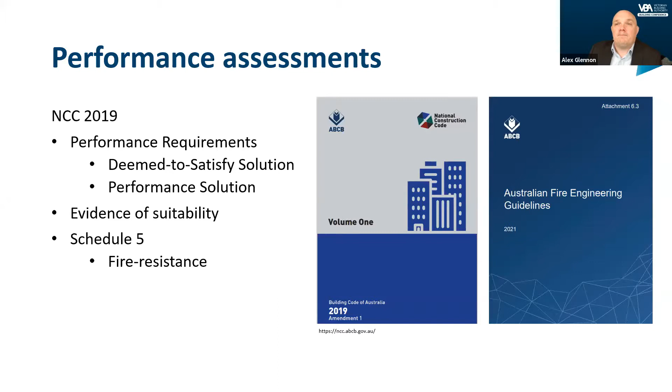Thank you for that work, Nicholas and Alex. You've provided everyone a lot of information there, and actually provided some really tangible and real examples of observed compliance issues. And one of the things that I've taken away from it is the critical role of the manufacturer's system and their specifications being followed to the T.

We've had a few questions come in. One of the questions relates to, can combustible external cladding be installed crossing the separating wall without a performance solution? Can definitely answer that one, that no, it would definitely require a performance solution to be considered. If EPS is used in external cladding, it will form a horizontal link between the dwellings, and we no longer comply with the performance requirement to prevent the spread of fire.

Right, thanks for that, Nicholas. Another one relates to the lightweight construction products, such as the Boral shaft liner. Do they need to be installed by certified installers? That seems to be one of the questions that's coming through quite commonly. I'll jump on that one as well. No, I would first suggest always read the manufacturer's installation guidelines, specifically their warranty sections. They normally say that they will recommend that a licensed trade or installer utilize their product, but read their liabilities first and their warranty conditions before making a decision.